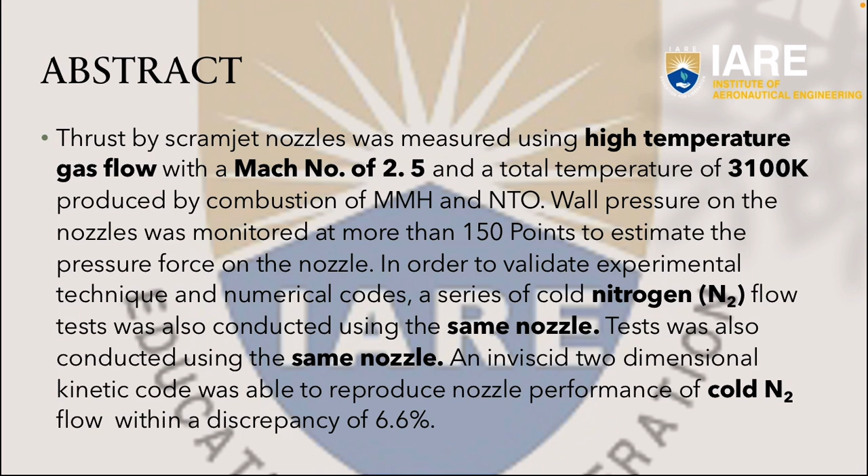An inviscid two-dimensional kinetic code was able to reproduce nozzle performance of cold N2 flow with a discrepancy of 6.6%. The calculation also agreed with the experimental results of hot MMH NTO flow with an error of 3.6%.

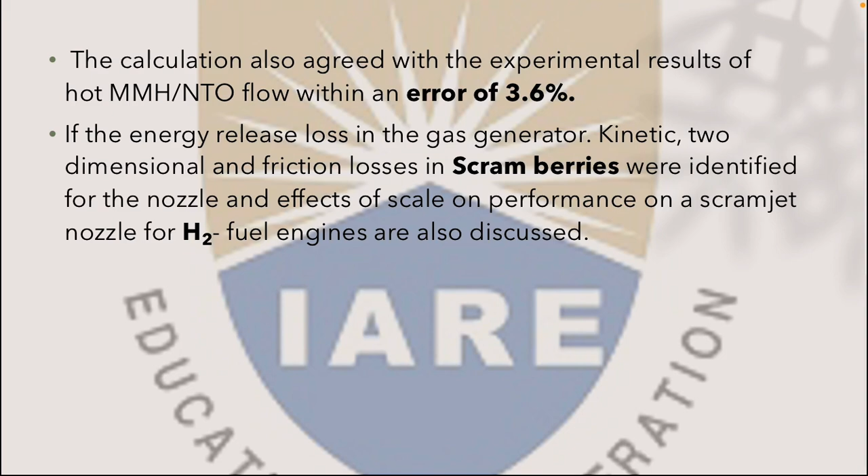Introduction: for a space plane driven by scramjet engines, requirements of propulsion, aerodynamics and structure necessitate airframe-integrated engines, in which case the forebody works as a pre-compression part for the inlet and the afterbody acts as an external nozzle for the scramjet engine.

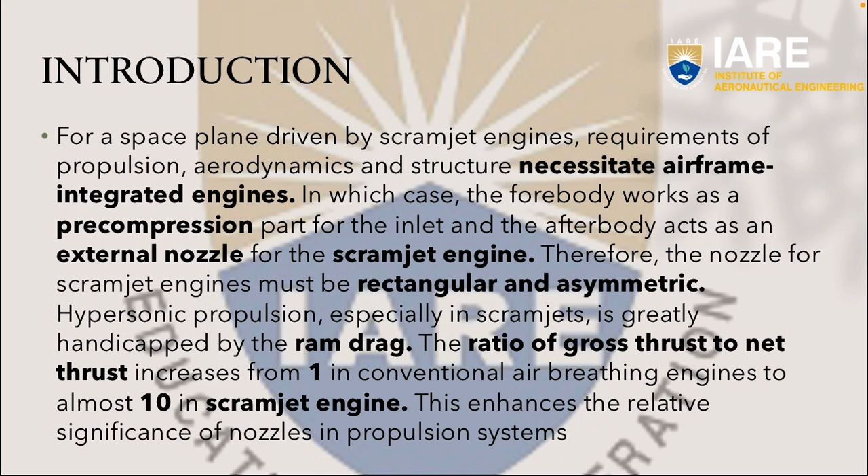Therefore, the nozzle for scramjet engines must be rectangular and asymmetric. Hypersonic propulsion, especially in scramjet, is greatly handicapped by the ram drag. The ratio of gross thrust to net thrust increases from 1 in conventional air-breathing engines to almost 10 in scramjet engines. This enhances the relative significance of nozzle in propulsion system.

The most prominent feature of the scramjet nozzle flow are the effects of non-equilibrium in high-speed nozzle flow and non-uniformity of the incoming flow from the combustor. It has been reported that these factors affect lift thrust delivered by the asymmetric nozzle as well as the main thrust. Accurate estimation of performance of the nozzle is a most essential step in development of scramjet engines.

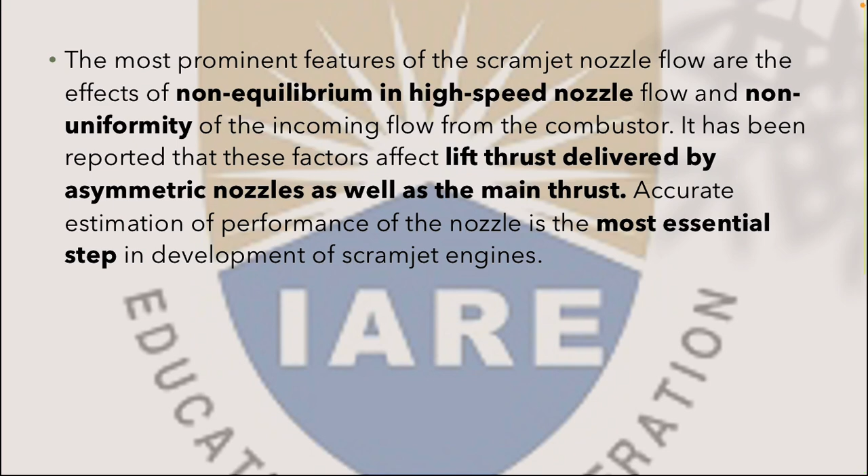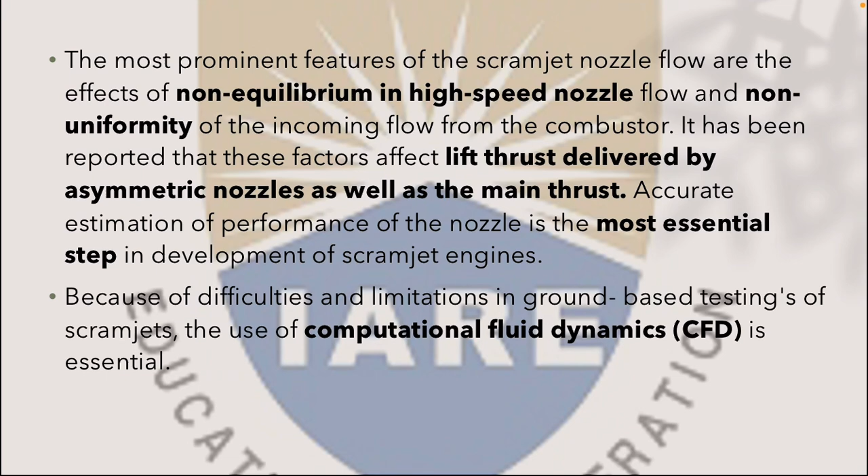Because of difficulties and limitations in ground-based testing of scramjets, the use of computational fluid dynamics is essential. There has been some numerical studies on scramjet nozzles. Harloff and Lai calculated 2 and 3 dimensional flow of scramjets in the range of free stream Mach number from 3 to 14.

Wall pressure, skin friction and heat transfer rate were computed using a Navier-Stokes code assuming a constant specific heat ratio. Wall pressure was compared with that in experiments.

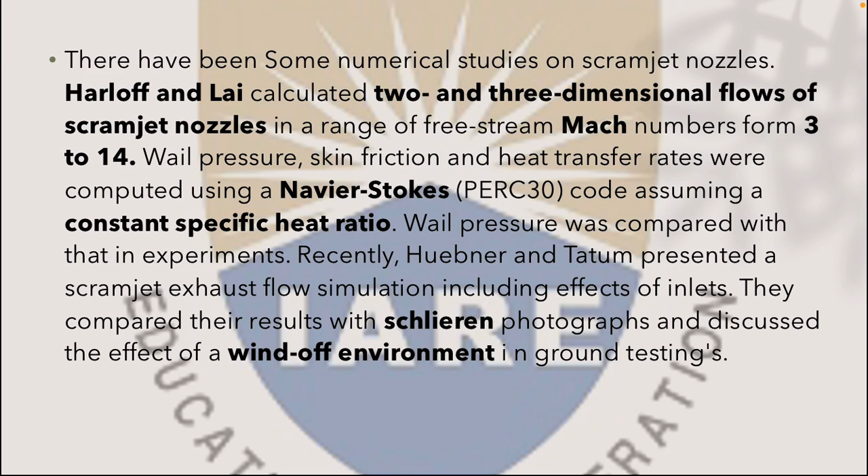Recently, these two guys presented a scramjet exhaust flow simulation including effects of inlets. They compared the result with Schlieren photographs and discussed the effects of wind-off environment in ground testing.

However, there have been relatively few experimental studies for code calibration. Most such experimental studies have employed substitute cold gas to simulate hot combustion gases, except for a study employing a detonation tube. The most peculiar aspect of nozzle flow in scramjet nozzle, such as the effects of non-equilibrium, cannot be investigated in such cold flow experiments.

It is reported that overall system performance in scramjet is very sensitive to internal skin friction. The most important performance thrusts have neither been measured nor has comprehensive investigation on various losses been reported.

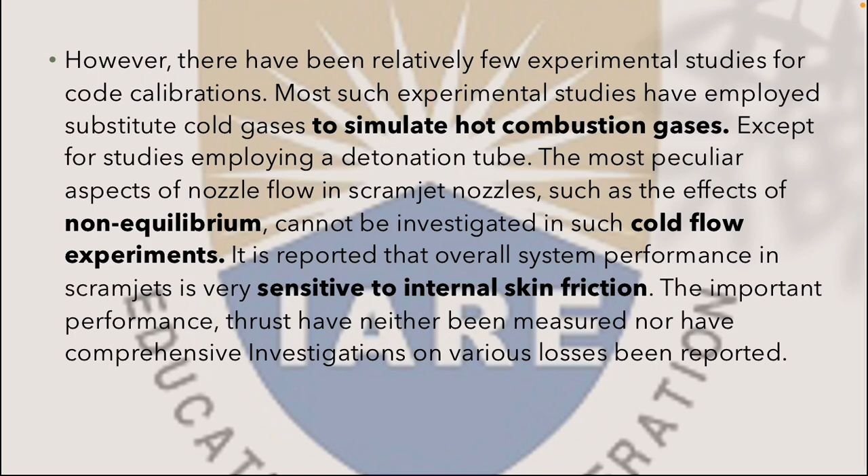For the purpose of establishing experimental techniques and validating engineering and analytic codes for scramjet nozzle, a series of experiments were conducted to study scramjet nozzles under Mach 8 flight conditions using high temperature gas flow.

Thrust produced by an asymmetric nozzle was measured by a load cell in high altitude conditions. Static pressure distribution on ramp and cowl walls are also measured to calculate thrust by the wall pressure. The pressure thrust was compared with the thrust measured by load cells.

The thrust performance and measured results of pitot and static pressure were compared with calculation using a two-dimensional kinetic code. Losses in nozzle flows were identified and several parameters governing the flow are discussed here in the experiment.

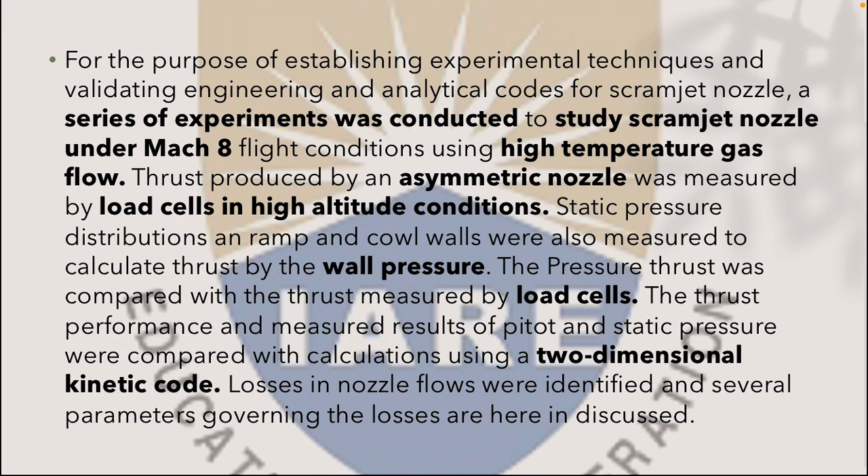A gas generator burning monomethyl hydrazine and nitrogen tetroxide was adopted to produce high temperature gas flow. The main reason for using these propellants was to enable accurate measurements of a relatively small increment of thrust due to scramjet nozzles. Use of these propellants makes it possible to use a compact feed system, thus minimizing interference with the thrust measuring system shown as TMS in figure 1.

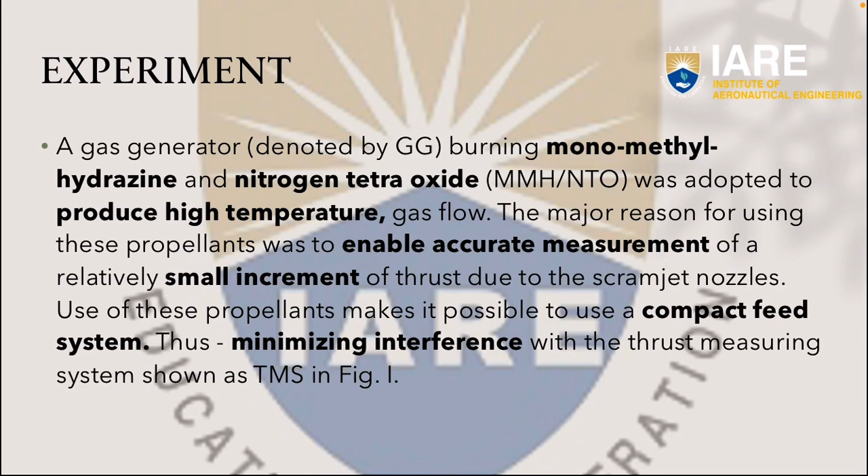Figure 1 describes the scramjet nozzle and thrust measuring system installed in a test cell. The combustor consists of an injector with acoustic cavities to prevent combustion instability, and a de Laval nozzle to accelerate the combustion gas flow to Mach 2.5.

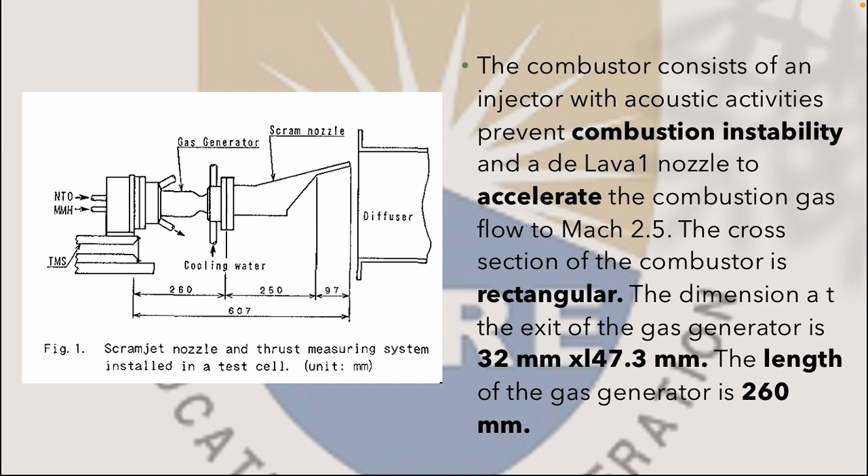The cross section of the combustor is rectangular. The dimension of the exit of the gas generator is 32 by 147.3 millimeters, and the length of the gas generator is 260 millimeters. The stagnation temperature was designed to be 3100 Kelvin and the stagnation pressure to be 1 megapascal. The static temperature and pressure at the exit of the gas generator were 2100 Kelvin and 0.05 megapascals respectively.

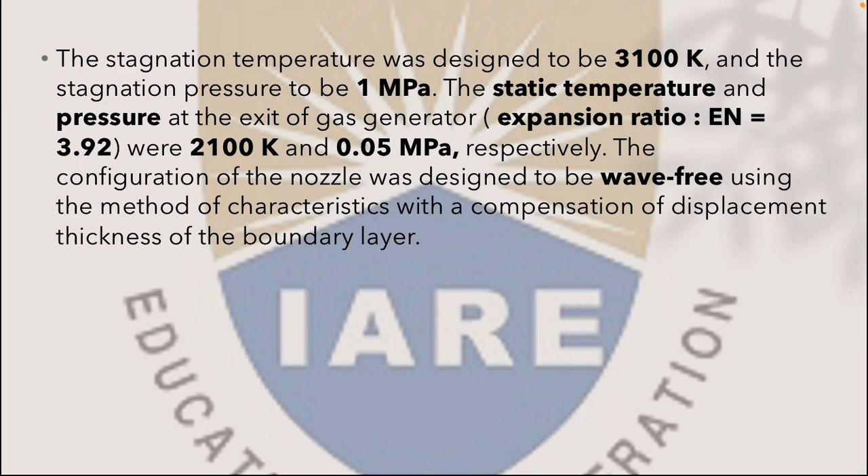The configuration of the nozzle was designed to be wave-free using the method of characteristics with a compensation of displacement thickness of the boundary layer.

A simple configuration using plane walls was adopted for the scramjet nozzle. In this experiment, the ramp corresponding to the after-body of the airframe was inclined by 15 degrees to the axis of the GG, and the cowl was parallel to the GG.

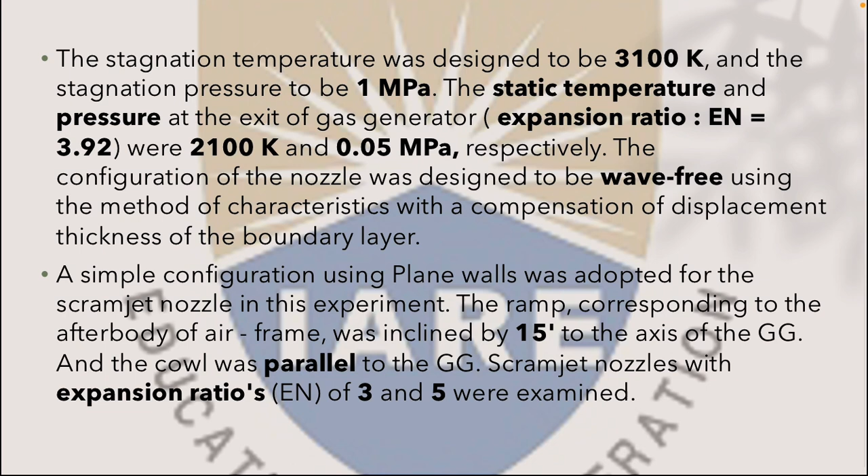Scramjet nozzles with expansion ratios of 3 and 5 were examined. The expansion ratio of the scramjet nozzle was defined by the ratio between the projected area in the axis of the GG and the area of the inlet of the scramjet nozzle. This definition is the most suitable choice for the experimental conditions.

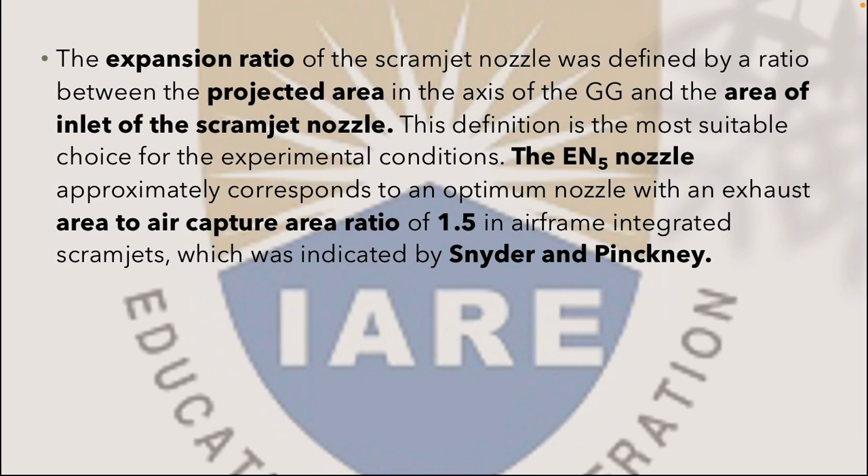The EN5 nozzle approximately corresponds to an optimum nozzle with an exhaust area to capture area ratio of 1.5 in airframe-integrated scramjets, as indicated by Snyder and Pinckney.

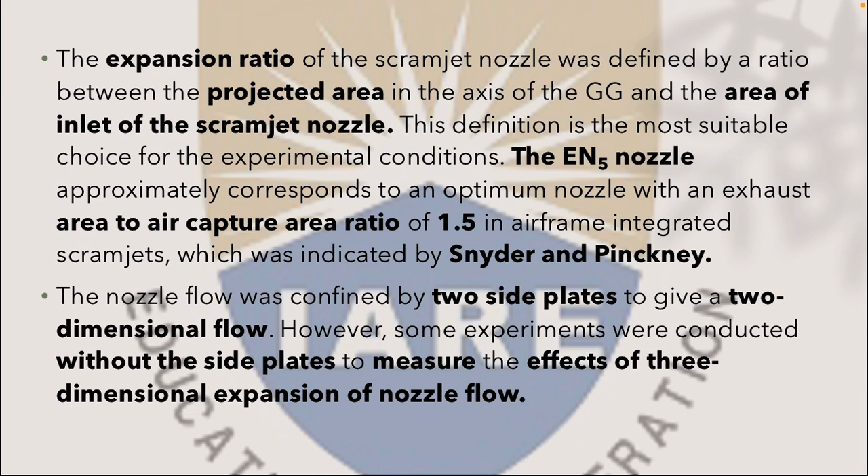The nozzle flow was confined by two side plates to give a two-dimensional flow. However, some experiments were conducted without the side plates to measure the effects of three-dimensional expansion of the nozzle flow. The configuration of the gas generator and scramjet nozzle with EN equals 3.8 is shown in figure 1.

The experiment was conducted using a thrust measuring system installed in the HATS, which stands for High Altitude Test Stand, at the National Aerospace Laboratory, Kakuda Research Center.

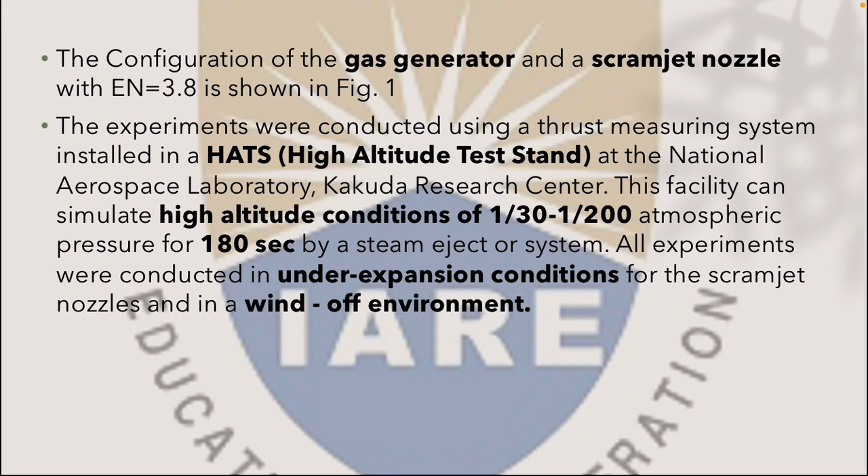This facility can simulate high altitude conditions of 1/30 to 1/200 atmospheric pressure for 180 seconds using a steam ejector system. All experiments were conducted under under-expansion conditions for the scramjet nozzle and in a wind-off environment.

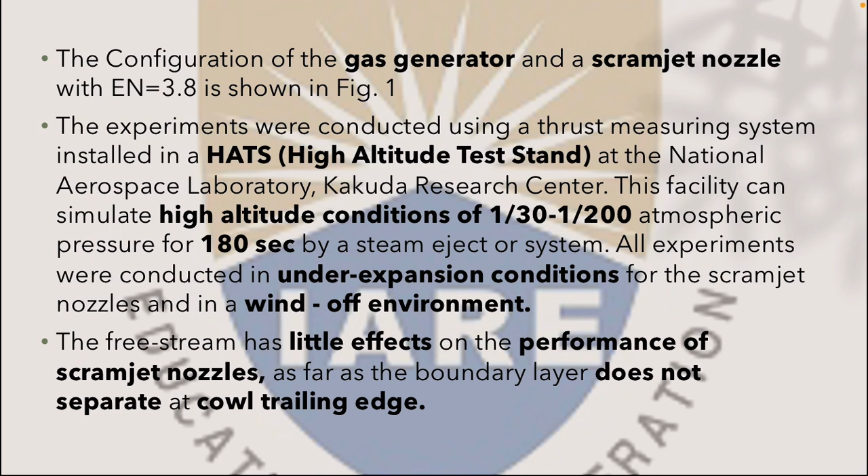The free stream has little effect on the performance of the scramjet nozzle, as far as the boundary layer does not separate at the cowl trailing edge. The wall pressure was measured at 150 points distributed on the wall of the scramjet nozzle using three scanning pressure sensors.

Now let us discuss the experimental results. Table 1 summarizes the thrust measured in the MMH/NTO firing test, since thrust is dependent on combustion pressure, oxidizer-to-fuel ratio, and throat area.

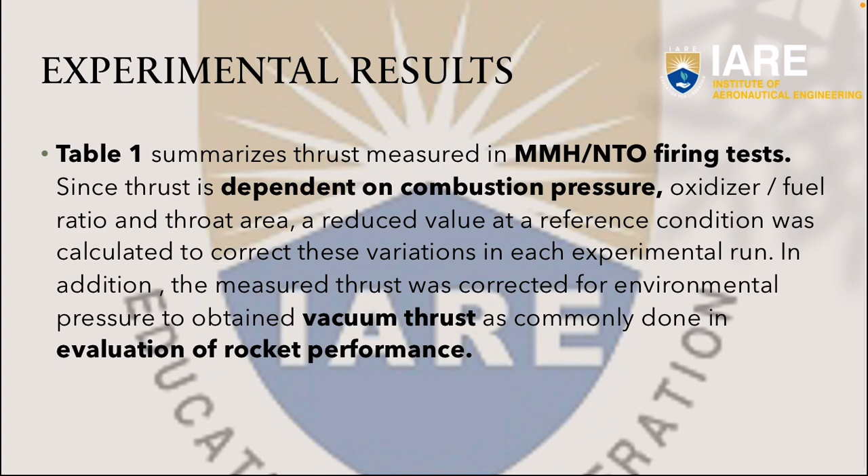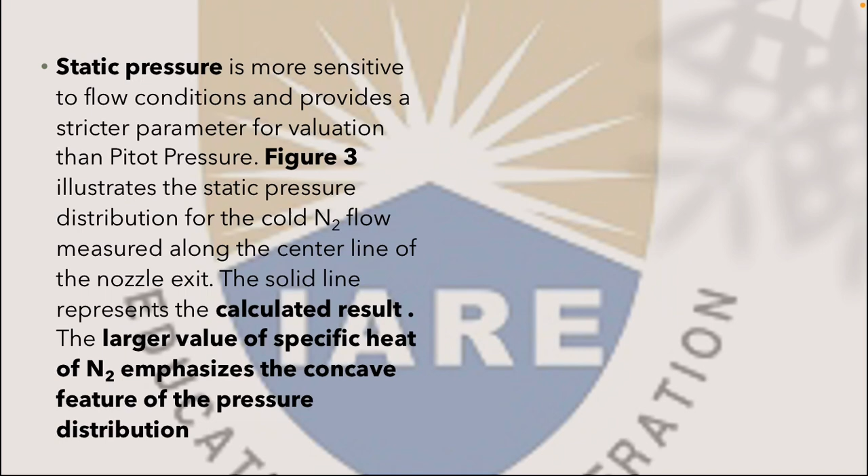Figure 3 shows that the static pressure is more sensitive to flow conditions and provides a stricter parameter for evaluation than the pitot pressure.

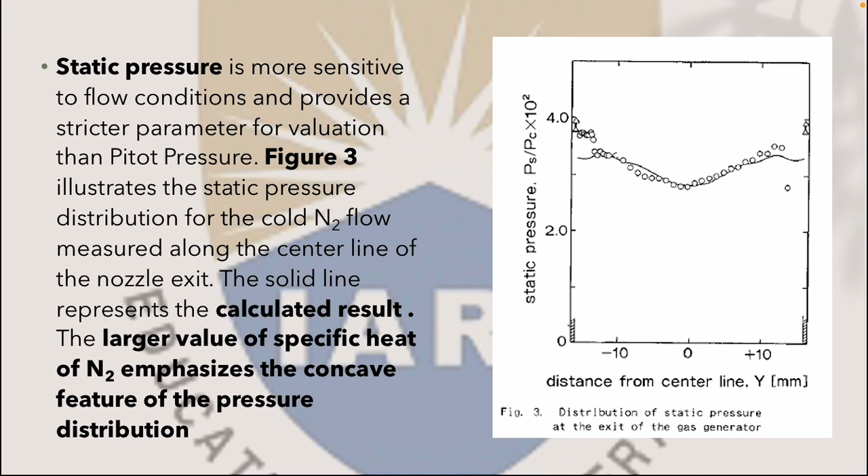Figure 3 illustrates the static pressure distribution for the cold N2 flow measured along the center line of the exit nozzle. The solid line presents the calculated results. The higher value of the specific heat ratio of N2 emphasizes the concave feature of the pressure distribution.

Conclusion: an inviscid two-dimensional kinetic TDK code was adopted to predict nozzle performance, and the results were compared with experiments using a hot MMH/NTO combustion gas flow of 3100 Kelvin and a cold N2 flow.

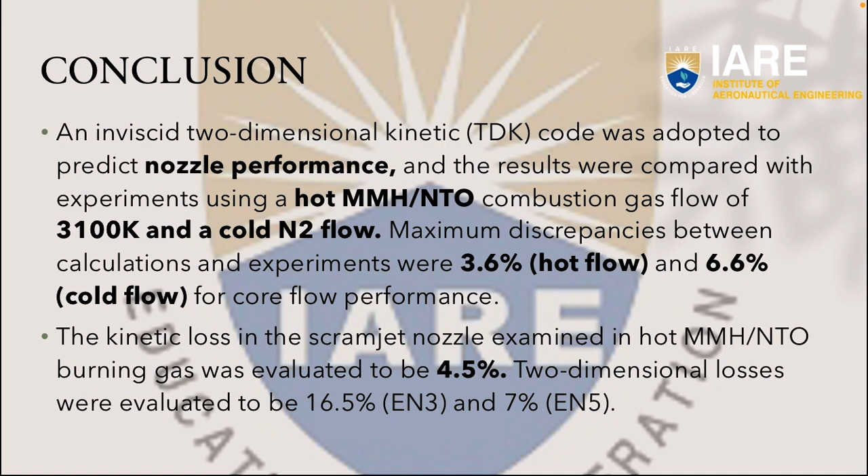The maximum discrepancy between calculation and experiment was 3.6% for the hot flow and 6.6% for the cold flow, in terms of core flow parameters and performance. The kinetic loss in the scramjet nozzle, evaluated with the hot MMH/NTO burning gas, was found to be 4.5%. Two-dimensional losses were evaluated to be 16.5% for EN3 and 7% for EN5.

The calibrated TDK showed a strong dependency of net thrust on nozzle performance, including two-dimensional kinetic losses in the nozzle flow.

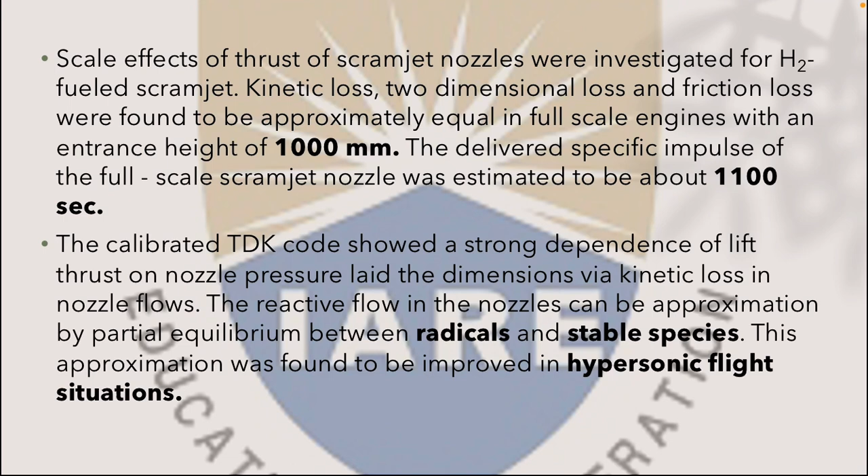The reactive flow in the nozzle can be approximated by a partial equilibrium between radicals and stable species. This approximation was found to be improved in hypersonic situations. Thank you.